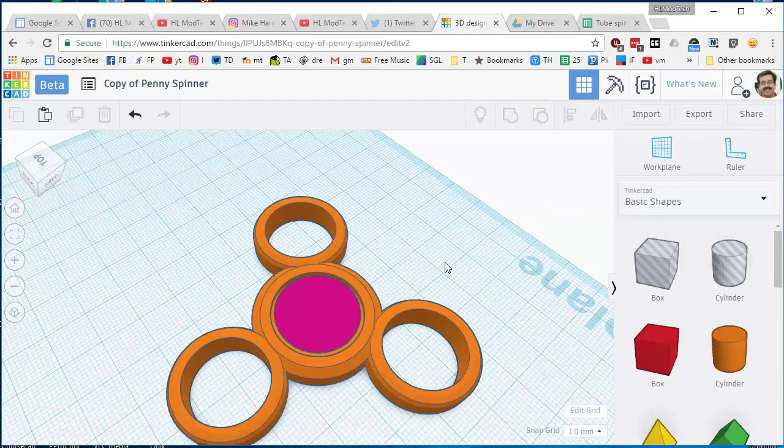Ladies and gentlemen, friends of Tinkercad, I bring you the penny spinner. Check this out. I will quickly disassemble it and show you how it was built.

Let's go down to the bearing, because that's probably the most important. I'm going to hide these other parts super quick.

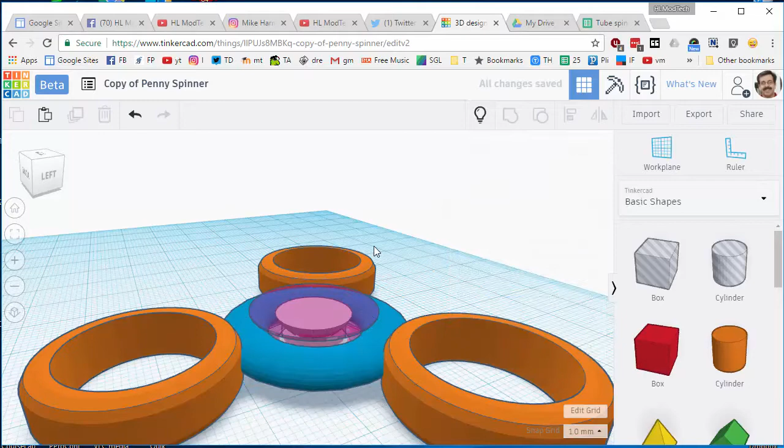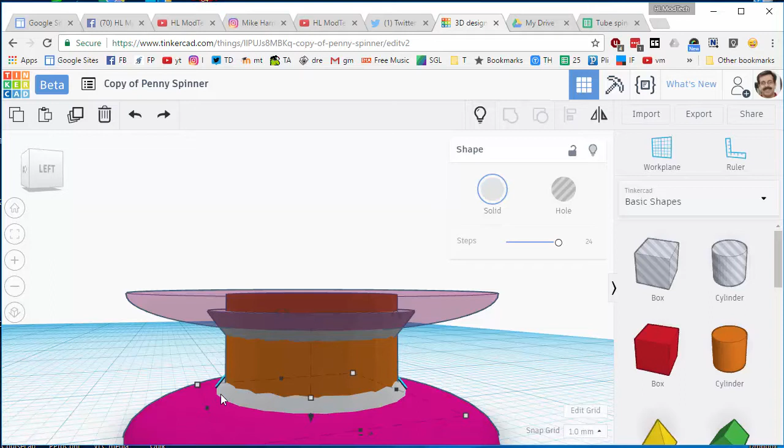You can see that it is really just a couple of half spheres, a couple paraboloids, and a cylinder whipped together. If I ungroup this, I'll show you how that all came together. I added the parabola there because it kind of acts like a fillet, which isn't essential on the bottom piece here, but when you get to this top piece, for that to be an accurate print, I needed something to make it so that it could extend from the cylinder out to the half circle.

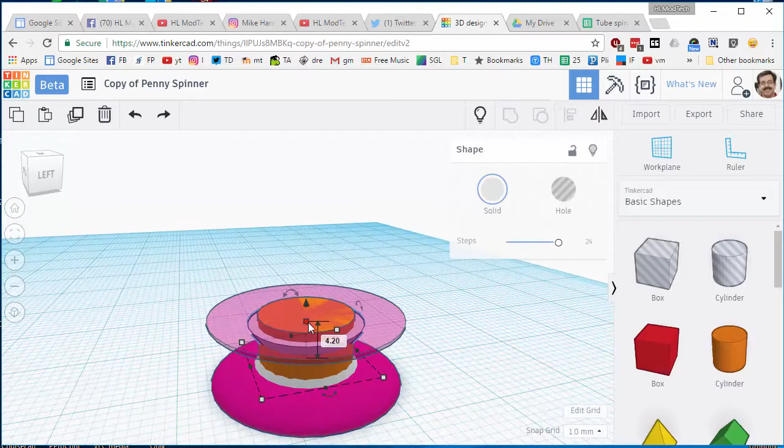Those pieces were, let me give you some measurements quick, 20 by 20 and 2 millimeters thick. The entire project was a total of 7 millimeters thick, and then I just did the parabolas in between, and I'm just guessing at those numbers right now. So I'm not going to say they're perfect, but they do work.

Let's group that back together, and let's take a peek at the next part of the project.

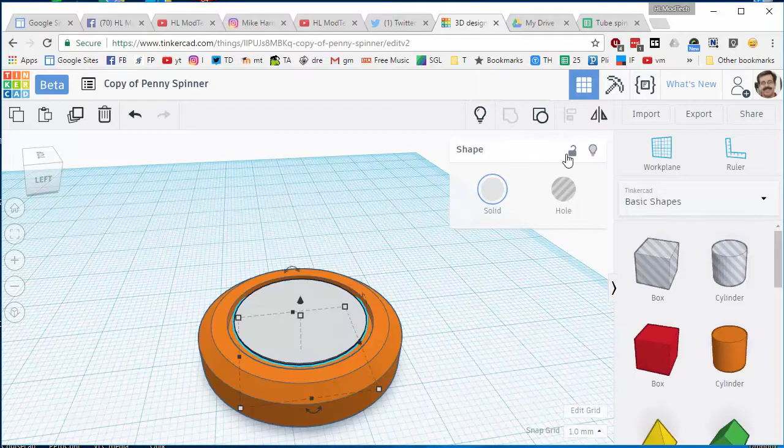So for this to work, you need to have a distance all the way around so that you can print all of those items without them becoming fused together. If I take this and make it transparent, you can see I've got a nice gap all the way around. Check out how I built it.

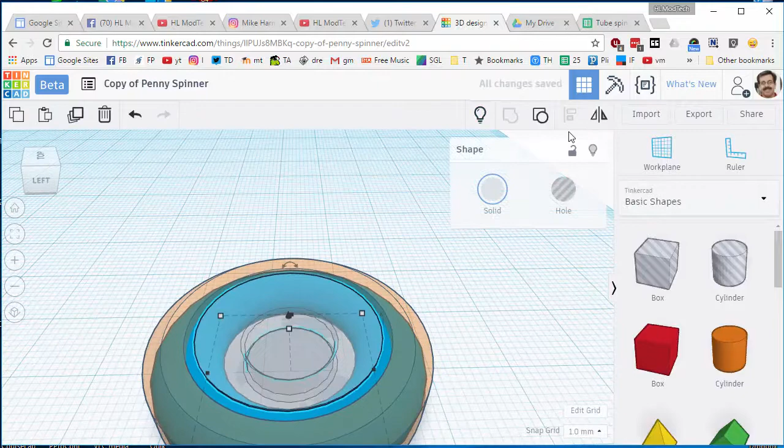Let's hide the center part. It is simply a tube, and I like 15.4, 4.25, 60 sides so that it's nice and round, a bevel of 2, which gives me that nice angle, and one segment. But then the slick part was I added this tube inside, and I just worked the numbers until it fit like that, and I was good to go.

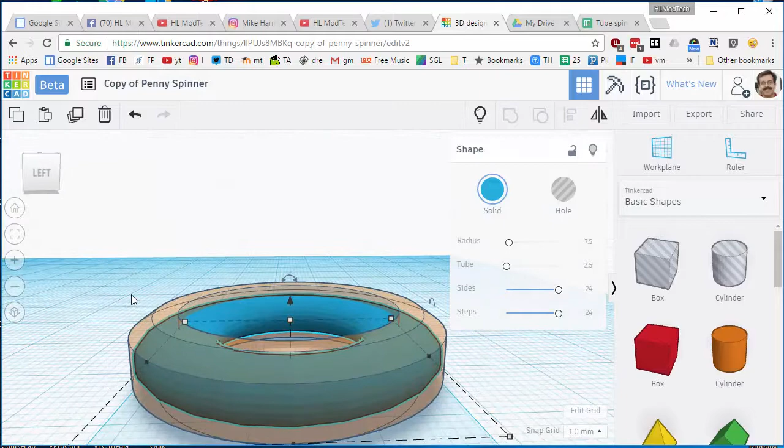Take those two parts and group them, and you've got a sweet bearing for all your parts.

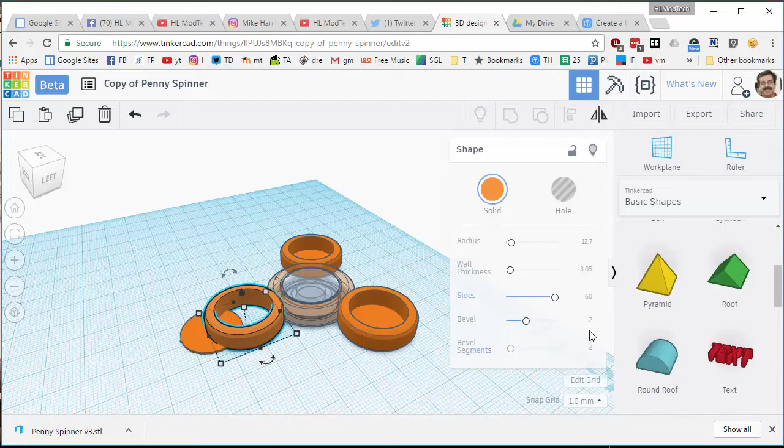The last part of the project was my tubes. With those in place, you can see that I used a radius of 12.7 and a wall thickness of 3.05. That gives me 19.3, which is a good size for a penny. You may have to tap them in with a hammer, but then they stick better. I do 60 sides, a bevel of 2, and segments of 2 to get that nice rounded shape.

And then I had trouble today with my pennies falling out a little bit, so I have decided that I'm going to add these little pieces underneath. And of course you just center, and then everything's groovy. Once you've got that done, you can group your whole project together.

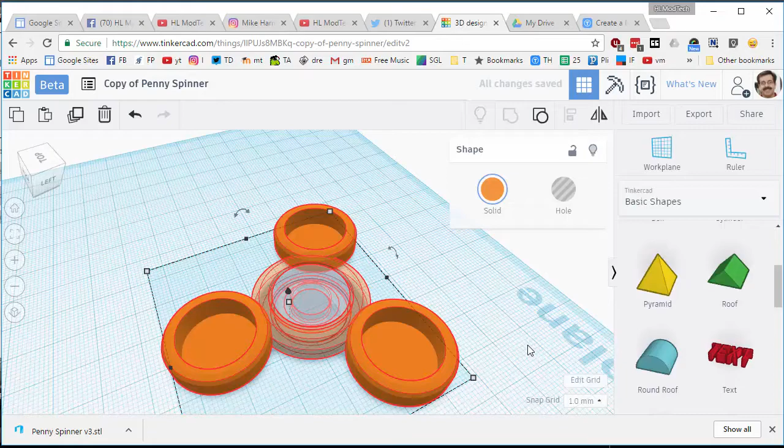I hope you had as much fun learning about this as I did experimenting as I built it. If you've got a better idea, please take a shot at making a cooler one. And anything you do, please share it with us.